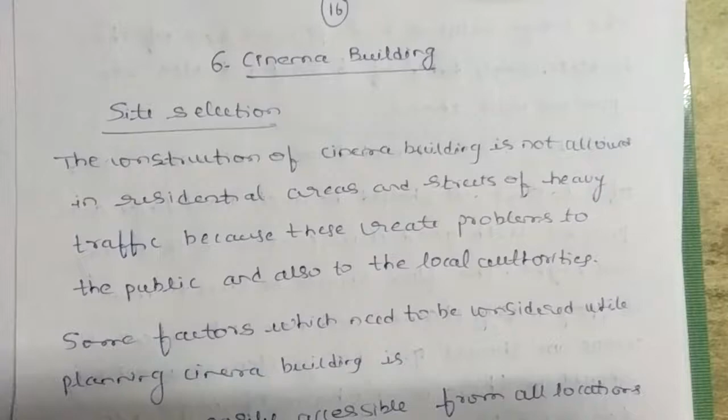Then let us come to the last public building into consideration, that is the cinema building. The cinema building is a place of entertainment. Accordingly, the planning and the construction of the cinema building should be done.

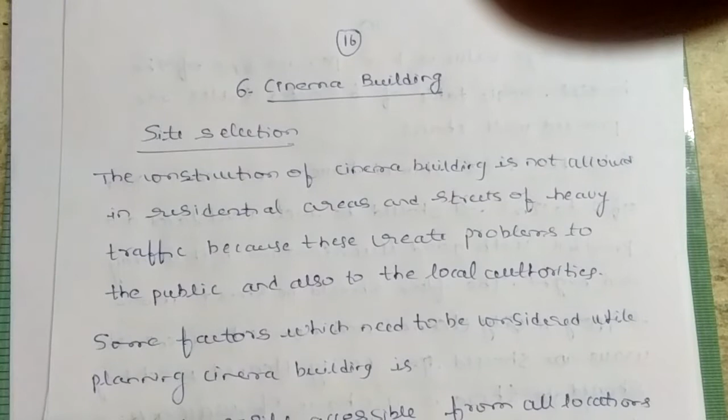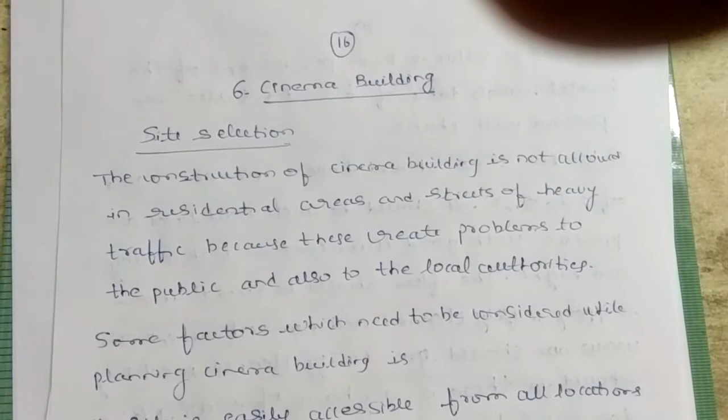So what are all the things that we need to plan in this building? First of all, how the site should be selected. After selecting the site, or rather during the construction, how the auditorium should be situated, how the reception counters, that is the office and the counters for taking the ticket, should be situated,

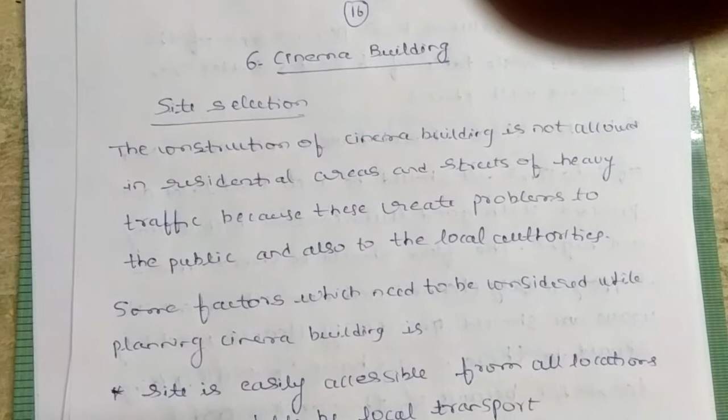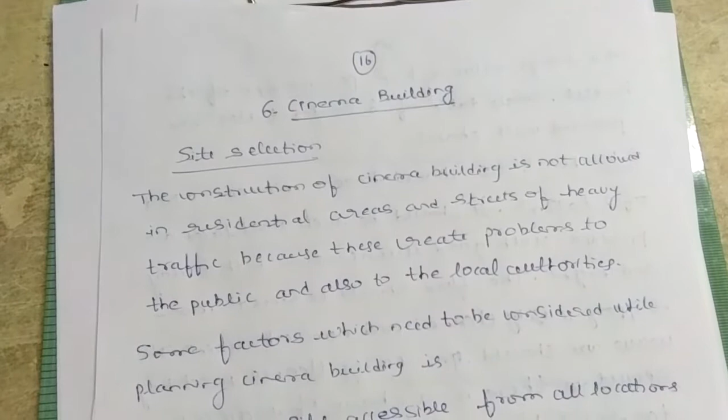how the sound effects should be there, what are all the other components of the cinema building, that is how much space should be given for parking, how much space should be given for garden if at all it requires. So all these parts should be considered.

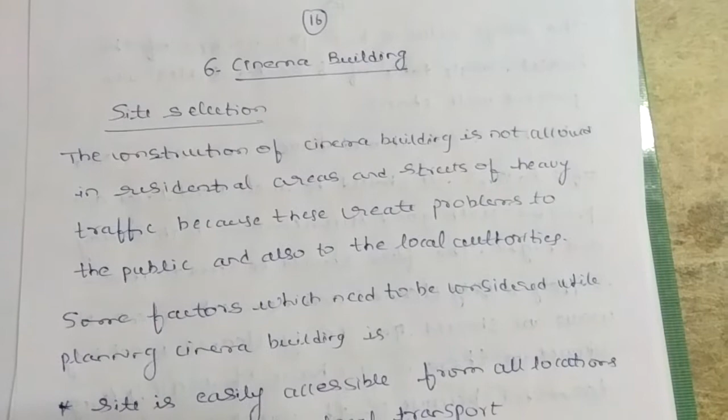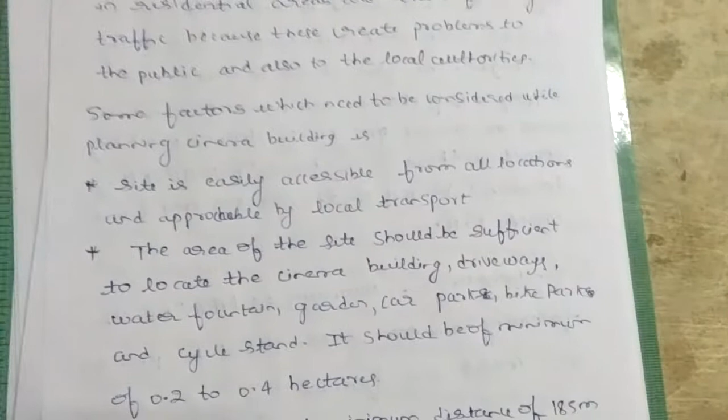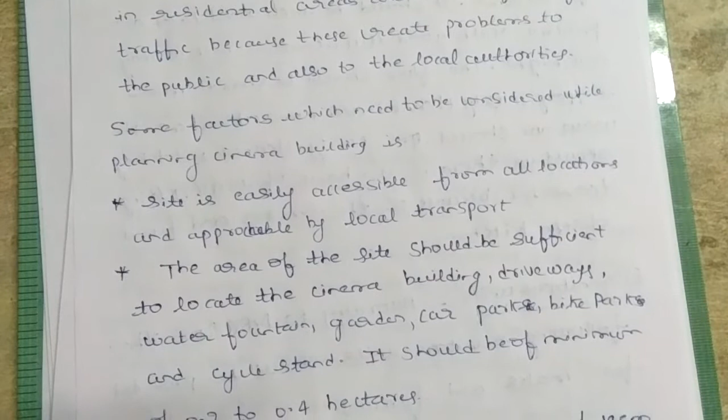So here we can see cinema building, it is a place of entertainment, and how the site should be selected for the cinema building. The site should be easily accessible to all. If the cinema building is constructed in a particular place in the city, it should have a convenient local transport so that people can reach the cinema theaters on time.

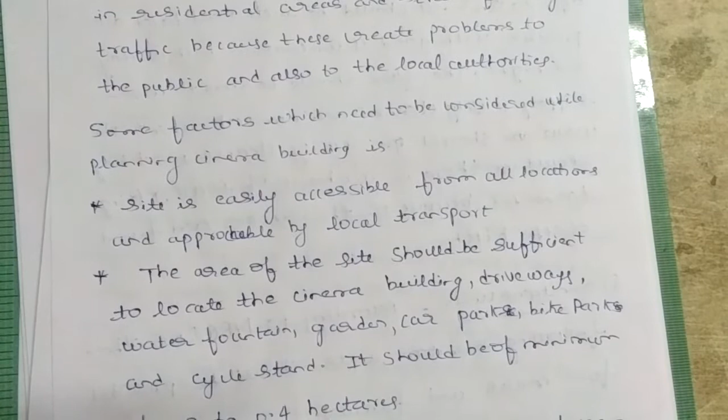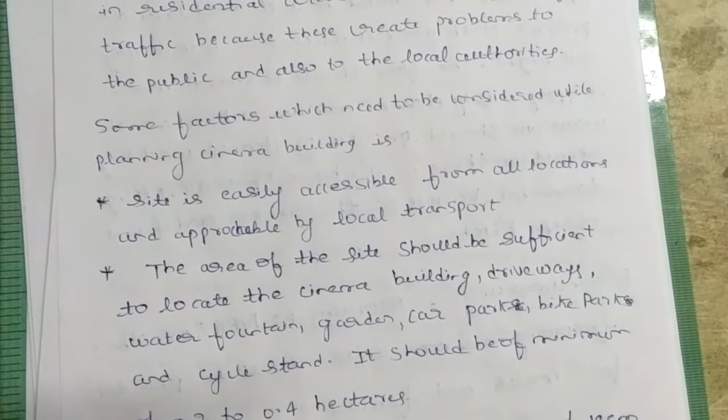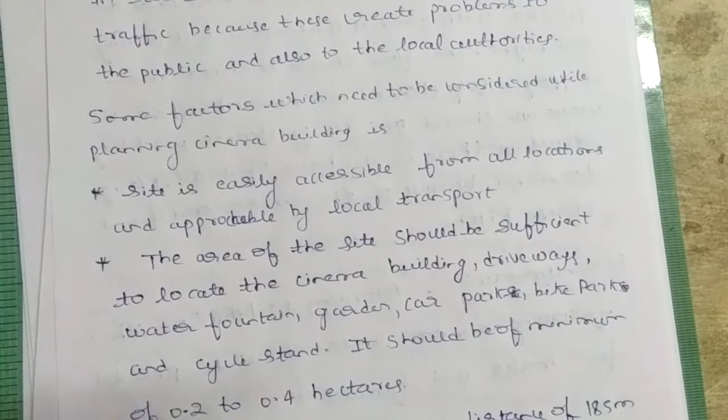Then it is very important to consider what are all the buildings that should be at distance from the cinema building, or rather the cinema building should be located at some particular distance from the different type of buildings which require more of silence, like educational institutions, religious institutions, and hospitals. All these institutes require some kind of silence. If the cinema building is located very close to it, there may be a sort of disturbance.

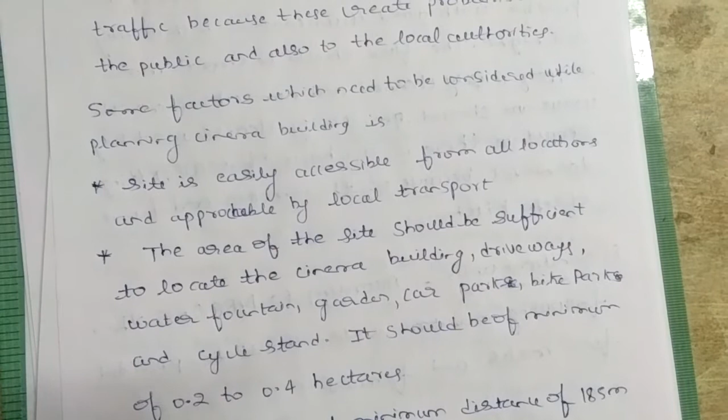So generally, the cinema building should be located at or up to 185 meters distance from the religious institutes, the educational institutes, and the hospitals.

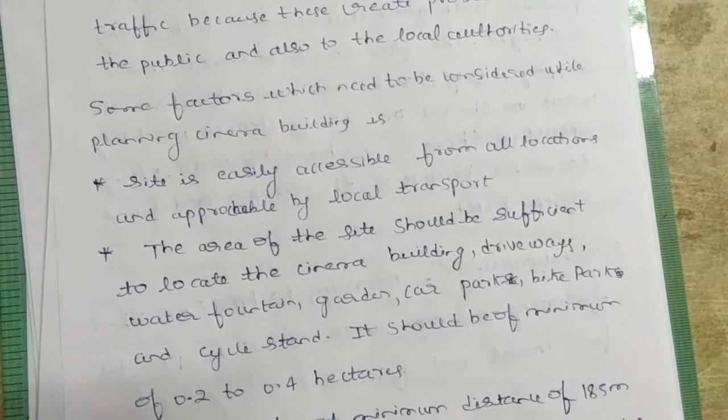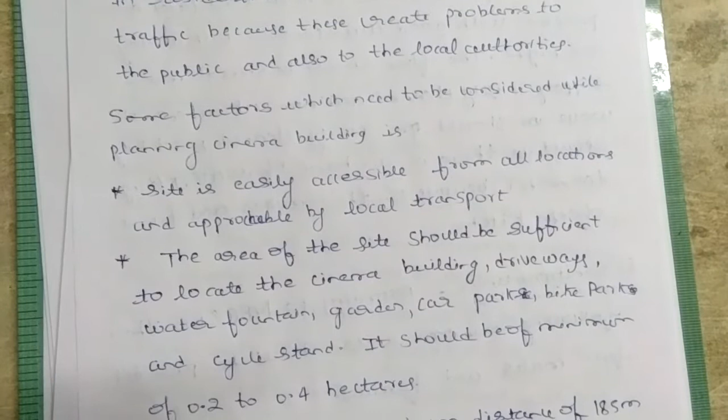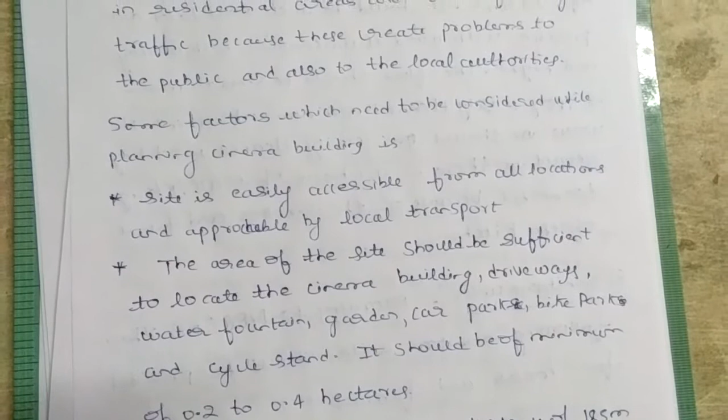Along with that, we need to consider the space required for the cinema building as well. The total building, how much space it can accommodate, how much space is left in front of the cinema building within the compound, and how much space is provided for the parking. It may be bike parking, cycle stand, or car parking. And if we require a garden or a water fountain, what is the area to be accommodated. So considering all these components of the cinema building, the area should be calculated accordingly.

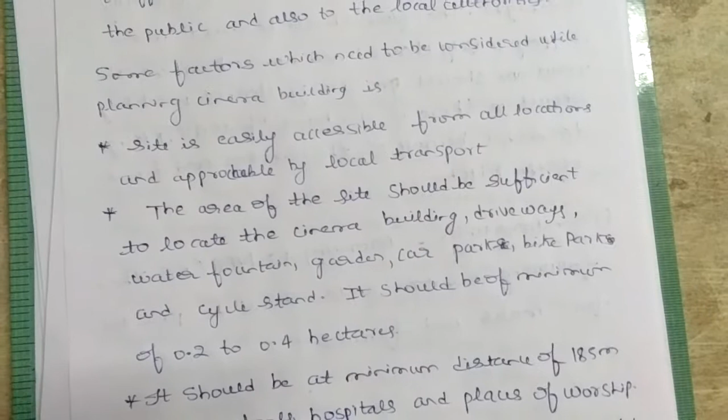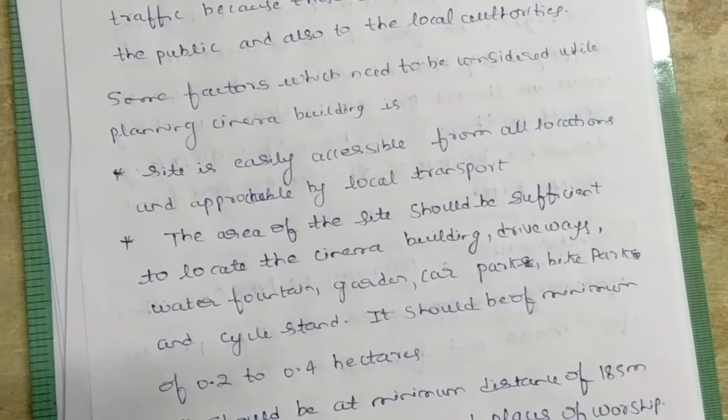So these are the requirements. In general we can say an area of 0.2 to 0.4 hectares can be given for the cinema building. 1 hectare means 10,000 meters square of area, or 10 raised to 4 meters square.

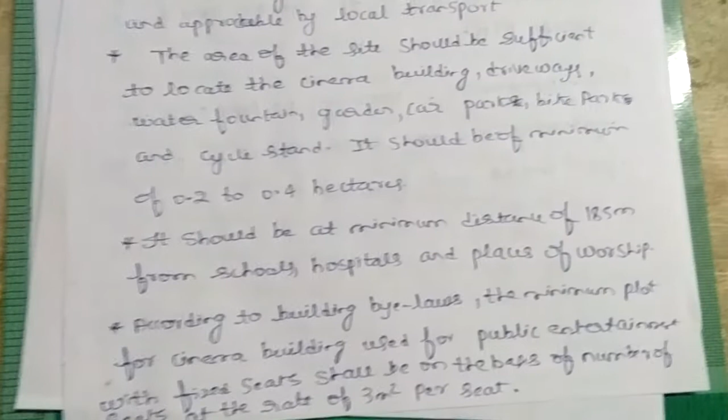So these are the different components that should be considered for the selection of the site of the cinema building. Okay, so let us discuss the next topic, that is what are all the different components that should be used inside the cinema building. According to building bylaws, meaning the rules and regulations made by the municipal corporation for the construction and planning of the different buildings, the minimum plot for the cinema building, or